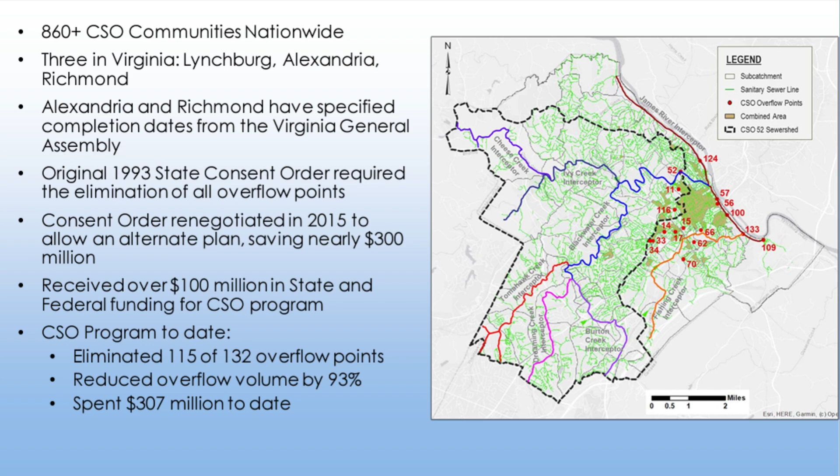We've spent about $307 million to date. So we've come a very long way. We really started this back in the 1980s, and I think that's one of the reasons why our program has been successful is we've been proactive. We've been out there addressing the problem from the very beginning and investing the funding we needed to make progress on the program.

So what does that look like now? The brown area in the slides on the right-hand side was the original combined sewer overflow area. It was about 6,000 acres, and when we started, we were discharging over 1 billion gallons of combined sewage into the streams in the James River. And we had 132 overflow points.

Now that area is down to 900 acres, and with all the controls, when we're done, we'll discharge on a typical year 22 million gallons of volume into the streams in the James River, and we'll have 18 overflow points. Originally we were going to have 17, but with this tunnel project we had to actually add one overflow point. Kevin, when he gets up to talk about the project a little bit, will go into more detail about that.

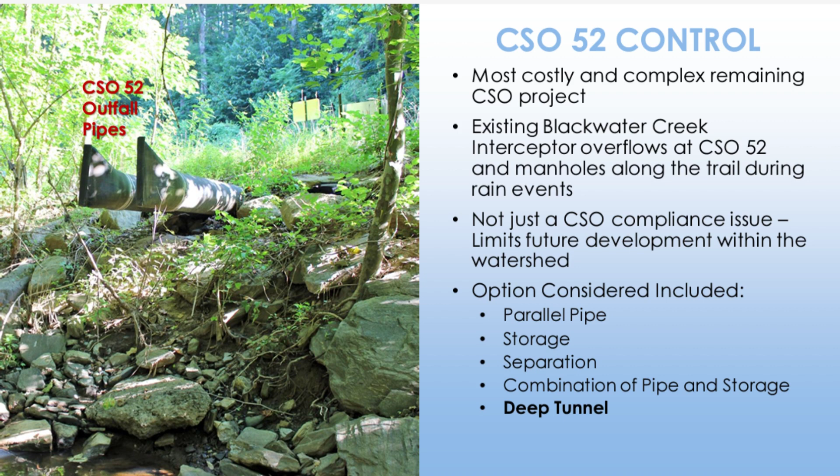Several other options were considered in lieu of the deep tunnel that was finally chosen, like parallel pipe, storage and separation, or a combination of pipe and storage. Ultimately, they didn't quite meet all the needs of the city, and so the deep tunnel was chosen.

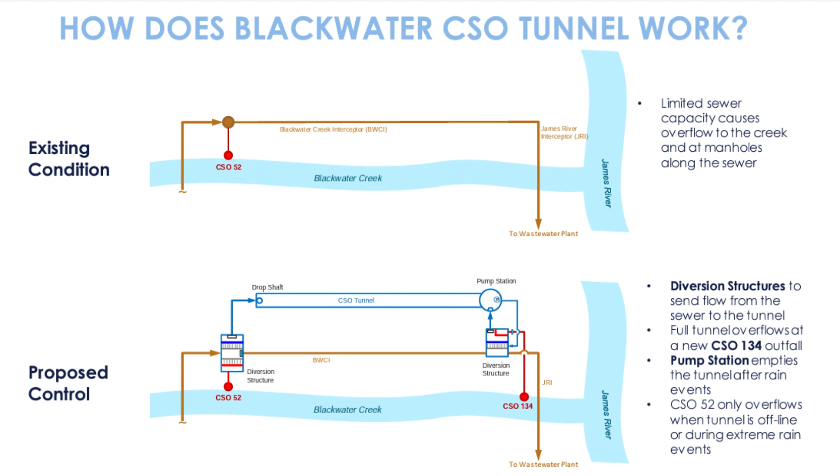Our purposes are to improve the water quality in Blackwater Creek and the James River. It reduces our overflows from 6 each year to 2 each year, changing those points where it comes out as well, which also helps us a bit. For our public, we want to protect public health, and one of the ways we do that is, right now in excessive rain events, the sewer actually pops out some of the sewer lines along the creek side and flows into the creek that way. So it'll remove that issue unless the tunnel is out of commission or there was a really excessive rain event.

It'll provide adequate sewer capacity for growth in Lynchburg. It actually covers roughly 70% of the city. It kind of goes into this system, so it'll actually help promote growth in the city. And it's an essential project for the completion of the overall CSO program.

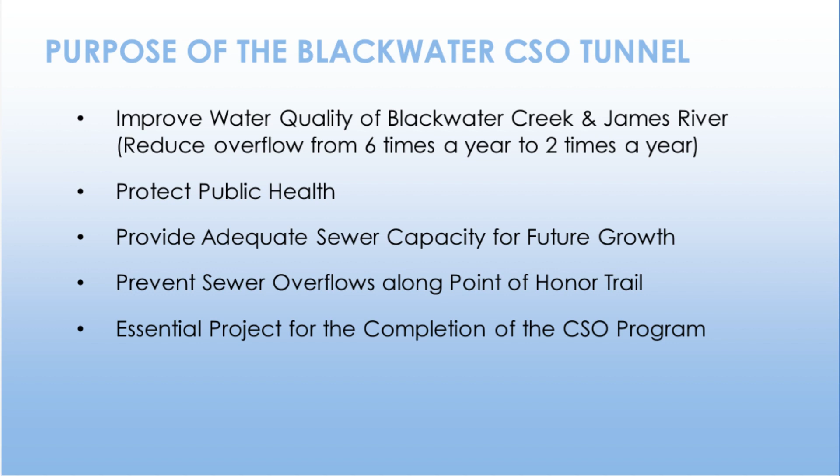Our schedule: we started design back in March '22. Right now we sit at about 90% design. We're going to complete that design over the next couple of months, and we're going to go out to bid early next year in January. After selection of the contractor, we expect to start construction in May of 2024, with a milestone of tunnel and shaft completion by December 2026, and final completion of the project in May of 2027.

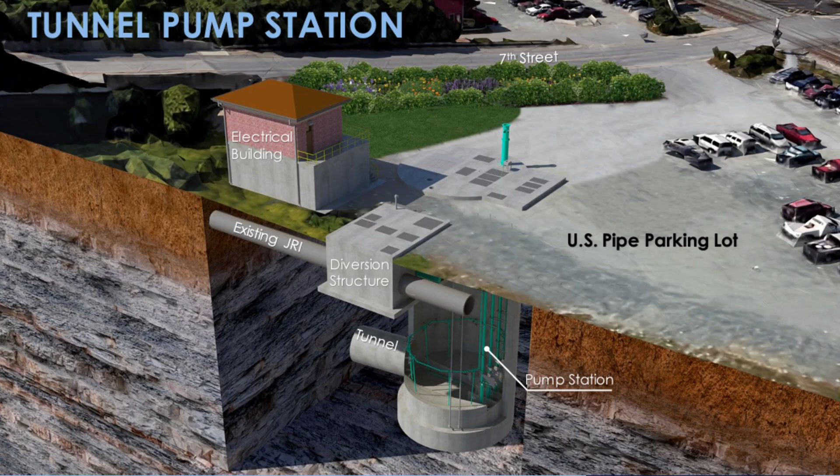I'm going to go through a few of the activities we'll see. This is just an overview, a rendering of what the eventual final look on that U.S. pipe site, the pump station site, will look like. You can see here the cutaway to the shaft below and the tunnel coming in. The electrical building will mimic the rail building on the other side of the creek in architecture, just to blend into the area. The surface of the pump station and structures will be pretty much at ground level, so it won't be a visual impact to the area.

So once again, here's the U.S. Pipe site. Right now it's being used as a parking lot for U.S. Pipe. We're relocating that temporarily to another site. We estimate 15 to 20 trucks daily, but we will be having a haul route established to maintain that traffic outside of their downtown area, trying to keep all of our heavy trucking out of the city.

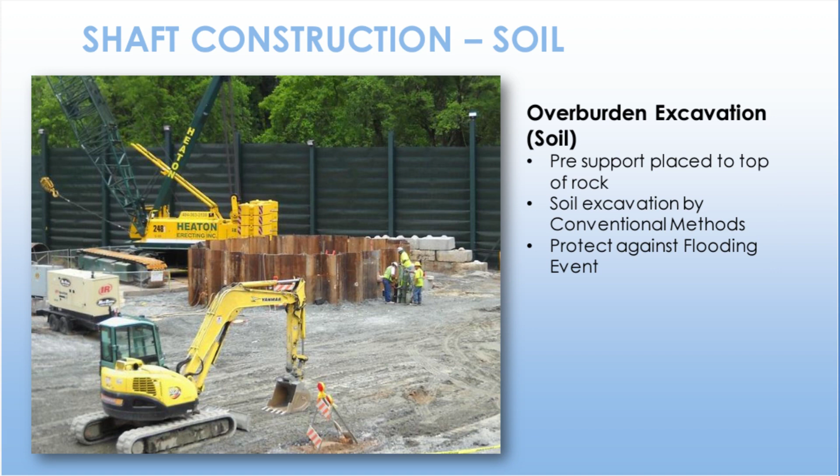So when we start this, we'll do shaft construction first. It always has a pre-support component where we're going to drive sheet piles down to rock or a little ways into rock, and then conventional excavation with regular excavators of the soil down to the top of the rock, putting in ring beam supports to hold the sheet piles up as we go. We're also going to keep it a little high off the ground level to protect against flooding, keeping it 2 feet above the 100-year flood line, just in case there's some issue while we're working. We'll be able to avoid flooding the project.

So once we reach the top of rock, we're going to switch to drill and blast excavation. We have several vibration and noise controls in place already. We're requiring a specialist be hired to design the blast to reduce the noise and vibration. There are several ways they do that, with spacing and how much explosives they allow in a hole at any time. There are also maximum allowable limits to the noise and vibration, so they will be held responsible for their actions as well. We're going to be performing pre-construction surveys to all structures within the area, within 200 feet of the tunnel alignment in either direction.

So basically what that entails is they'll come out, take pictures of the structure, go around, and look for cracks or anything else to be able to evaluate the impacts we have upon those structures. And then finally, we're going to have monitoring. We've got survey monitors and vibration monitors. They will kind of leapfrog along with the advancement of the tunnel, and they will be next to structures as well to monitor what's actually happening at those structures. I think there's up to 8 monitors at any given time on this project.

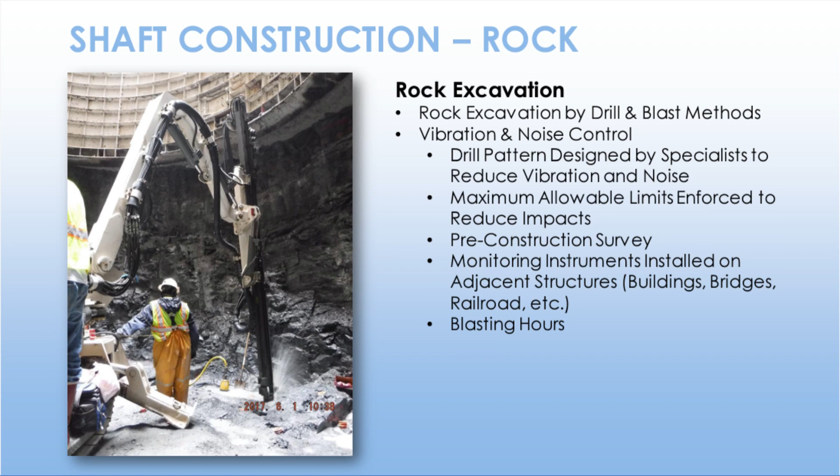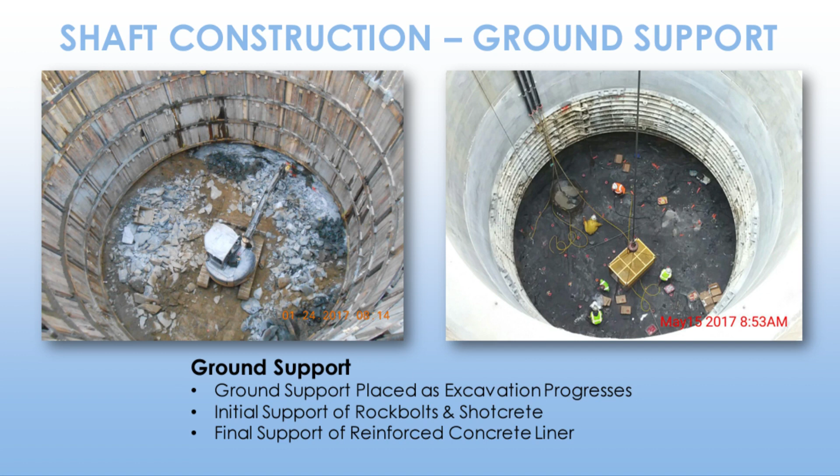Either way it gets excavated, it'll end up with a permanent cast-in-place liner. On the left here, you can see the tunnel forms. A bulkhead will be placed along that outside edge, and then the annular area between the rock and the forms will be filled with concrete, pumped in from outside. The center photo shows what the finished product looks like. Our tunnel will be very similar to that in size and shape.

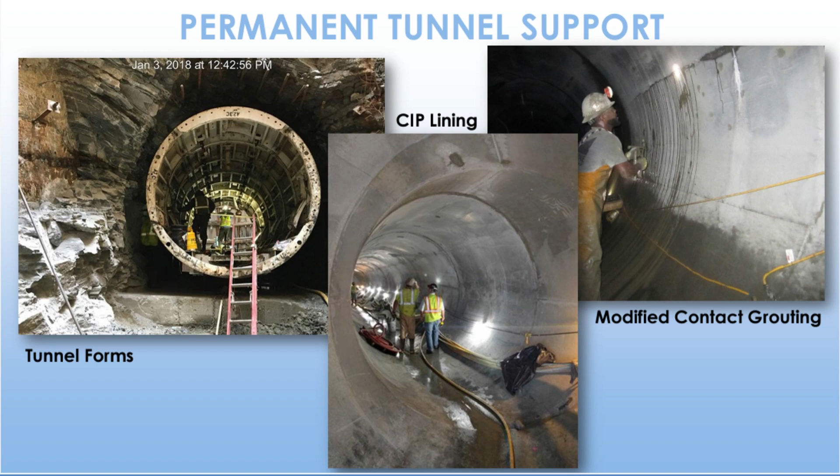So here we have the CSO 52 diversion structure. In this bottom left corner, you can see the flow will enter the center compartment, and at a certain point it raises up. Under normal conditions, it will just keep flowing through that same interceptor and follow that same path it always has. But during a rain event, at a certain point it will raise above this weir wall on the right-hand side, flow over that wall and into the structure that'll take it down to the tunnel. That structure is called a vortex, right over there by the drop shaft label. It'll then go down the drop pipe into the tunnel, and from there it runs the mile down to the pump station where eventually it will be pumped back out.

So that site is off. You can see here the location near Hollins Mill Park. We also have a haul route that keeps traffic at a minimum, or minimizes traffic in residential areas. There's an estimated 4 to 5 trucks daily at this site, and that's probably a bit conservative. There's not as much excavation to be done here, so there's not as much reason for construction traffic.

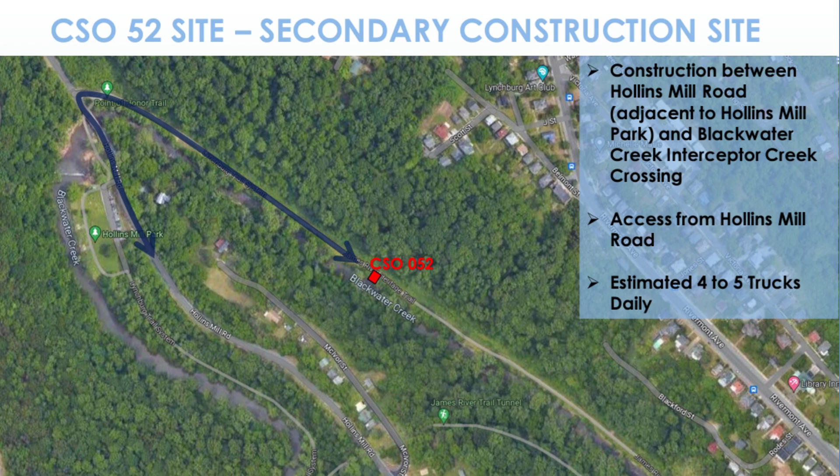There will be some interruption of the Point of Honor Trail during the duration of the construction, or the upstream portion of that construction, not the entire project. The trail will be closed to the public.

The Blackwater Creek Bike Trail will have no interruption from this project. At the end of our project, that trail is going to end up being relocated a little bit further inland, or uphill from the creek side. So that'll be after, but it'll be after we're complete over there, I think.

Okay, so I just thought of a couple of things I wanted to point out to you. First, I'd like to recognize Delegate Linda Walker for being here. Thank you for coming.

As I mentioned before, the General Assembly has been a very good partner with the city, and we received, for this particular project, $50 million in American Rescue Plan Act funding from the General Assembly to move towards completion of the CSO program. That won't cover the entire amount of this project. We're anticipating the cost to be at least $100 million, or around $100 million, maybe more, for this project, but we couldn't do it without that funding from the General Assembly.

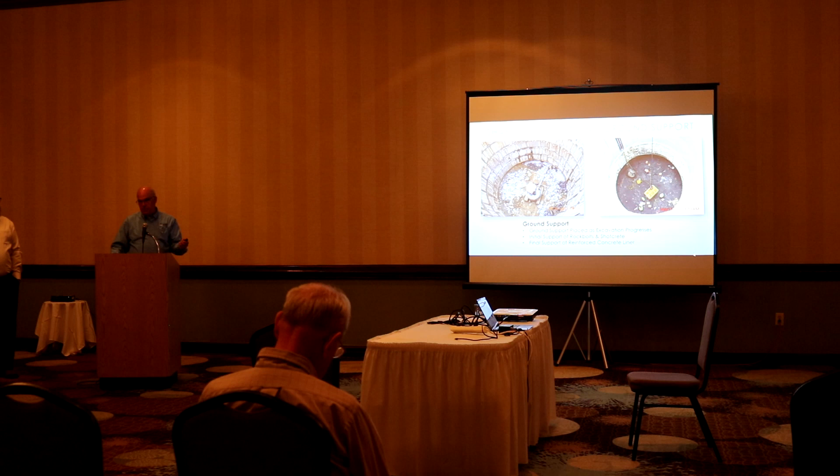So we looked at that. We actually looked at different locations - let me get back to the site plan. We looked at Hollins Mill Park as a potential for that. We looked at the U.S. Pipe parking lot as another option, because it has to be adjacent to the sewer line. The problem with the U.S. Pipe parking lot is you still have to get the flow to that point, because the point of CSO 52 is upstream of that location. Flow can't get there, so we'd have had to find some way to still get the flow to that point.

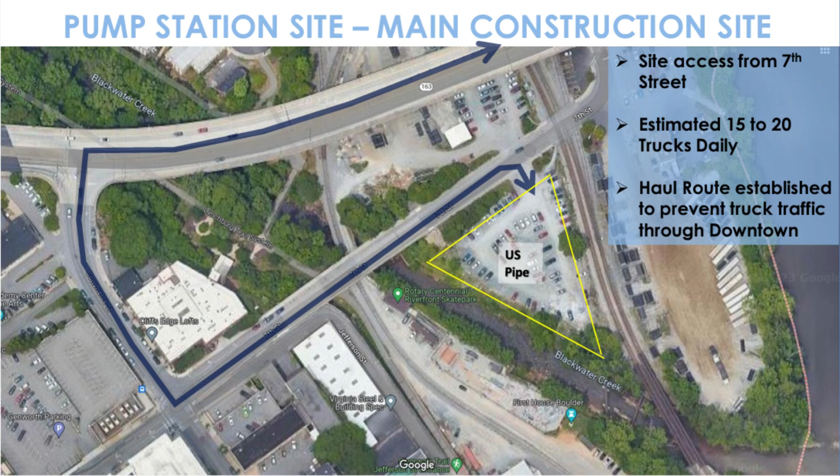The issue with the Hollins Mill site was it didn't capture enough. If you look at - so I'm finding the slide, one of the things we looked at - all right, here we go. So right here is actually the sewer line. CSO 52 is right at this point here where the sign is, and discharges into the stream. The sewer comes across here, makes a very abrupt 90-degree turn, and flows down towards downtown. So there wasn't any location here; this area wasn't big enough for a big storage facility.

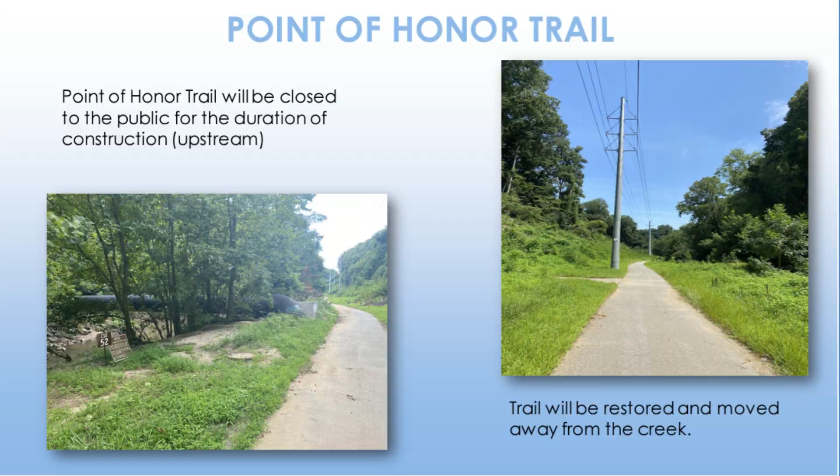And one of the things we did look at was value. Yes, this is a very expensive project, but we did look at the cost benefit of a tunnel versus a storage facility and what would have to go into a storage facility, because the storage facility we have at the water resource recovery facility was a $60 million project. So those aren't cheap either. And there would have to be other piping and appurtenances to get the flow to that point, and also a pump station constructed because it had to be pumped out.

So we looked at the overall cost per million gallons of flow eliminated going into the James River and Blackwater Creek, and came up with the plan that had the most benefit overall, and the tunnel was the option. A lot of other CSO localities are choosing the tunnel as well.

One reason it's so deep is that when you construct a tunnel, you want it in very solid, firm rock, because you don't want anything above it collapsing. We have extraordinarily hard rock in Lynchburg, and we've done a lot of geotechnical work, including borings and core samples at different points along the alignment, so we know what that rock looks like. As the geologists say, it's a competent rock—very solid.

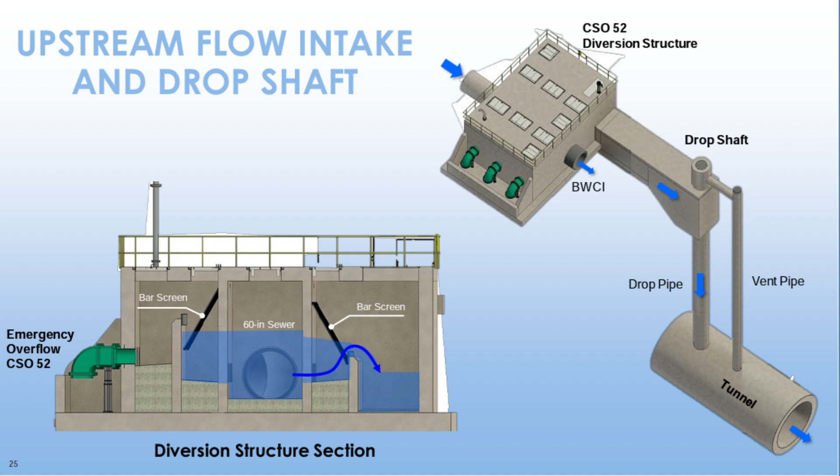The other thing we're planning on doing at this structure is having some educational information about the tunnel, about the project, about CSO. So we want this to be a public education piece as well.

How has this been looked at from the environmental changes that we see escalating? Has that really been fully taken into account so we're not doing like the highway department, where by the time they get a highway built it's already overused?

Yeah, so that's a great question. One of the things we did when we designed this was use a certain weather condition we have to design for, a certain period of time where we had a very wet period of years that we used to calculate and determine what the overflow volume is.

We've also done a lot of flow monitoring on the sewer lines, as well as sampling to determine the bacteria load and other contaminant loads in the wastewater. A lot of that has been taken into account. For example, another thing we did was assume the entire sewer shed was fully developed, fully built out, so every bit of capacity in the sewer system from a sewer flow standpoint is utilized.

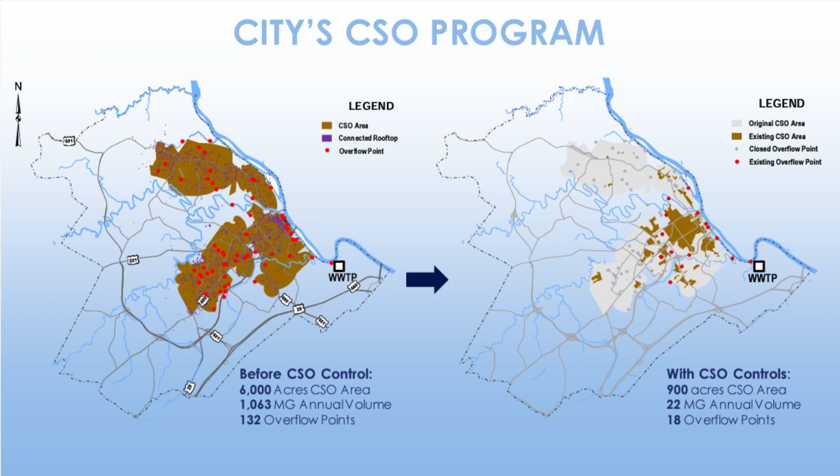Hopefully that'll take into consideration changes in weather patterns and increased rainfall or big storm events. We also designed several components to be up higher out of the floodplain to protect them in case larger storm events keep coming through. That seems to be the trend right now, but long term, who knows what's going to happen. We went ahead and raised the electrical building above the 500-year floodplain to protect all that equipment in case something like that would happen.

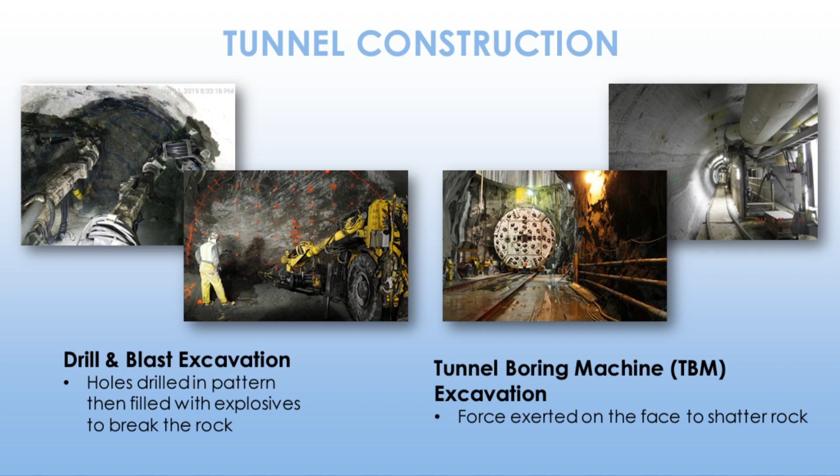So when you put it out to bid, will you allow contractors to decide which method they want to use? Yes, it's designed that way. Going back to the alignment, one of the things we wanted to keep open was that, if a contractor happened to have a tunnel boring machine that fit the criteria—the right diameter—it could be used for this project. We wanted to make sure they were able to use their existing tunnel boring machine, because if we had to build one from scratch to meet the requirements, it wouldn't meet the timeline—that's usually a couple-year process. Most TBMs are built overseas, in Belgium or Germany or somewhere like that, and they're very costly. So we wanted to keep options open.

We are also in the process of pre-qualifying contractors, because it's important to get a good contractor on a project like this. You don't want just anybody without tunnel experience trying to tackle a project this big. So there's a pre-qualification process contractors will have to go through. We had a meeting a couple weeks ago with a good turnout of tunnel contractors from around the country, so we're hopeful we'll get a good contractor and a good price on the project.

Did I hear a rumor that the machine stays in the tunnel after? Is that a rumor? That's forever—that's a rumor? They're too expensive, that's what I was thinking. No, they pull them out—it costs about $1 million just to refurbish.

So they pull them out and reuse them. To his point, we're leaving it up to him, because if we had a contractor that has the right size machine that's not being used, that's great, that'd be awesome, but we don't want to restrict it to people that only have a machine at this time, so we leave it up to them to decide which way they would like to go.

The machine is much faster, is that right? It is faster in some ways, but it takes longer to put it together, so it'll take nine months to refurbish the machine. What they do is build them on the surface, new hoses for all the hydraulics, new cabling, new everything. They run it a few times on the surface, then take it all apart and slowly put it together piece by piece underground. So it's a big process. I've been on one job where they didn't do it that way, and by the time they got it running, they wished they had.

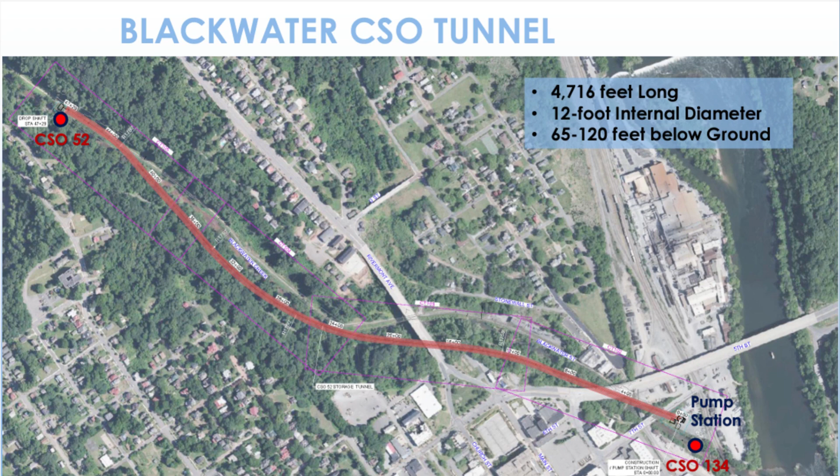Anybody else? Just one kind of an assumptive question. If a contractor had a TBM that would be well suited to this job, could we presume they might also be the low bidder?

Kevin, you want to take this? So I touched on this earlier. We're right at the cusp of financial feasibility with the TBM. Generally the rule of thumb is it needs to be a mile, that's where they start making their money back and it's about break even. So it's probably going to be roughly similar numbers, I would assume, whether it's a TBM or otherwise. Gotcha.